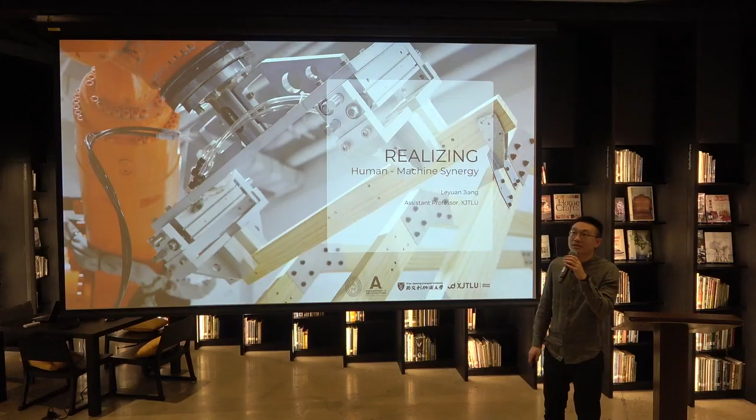Actually, I come from a background of practice. I previously worked in offices like Zaha Hadid Architects and Ole Scheeren offices. And I know that there is a huge gap between practice and research. That's why my research will always focus on how to realize things more efficiently, trying to understand the constraints and the limitations for the construction and how to enable the design. And at the same time, the design should consider the fabrication-aware design methodology inside these working processes.

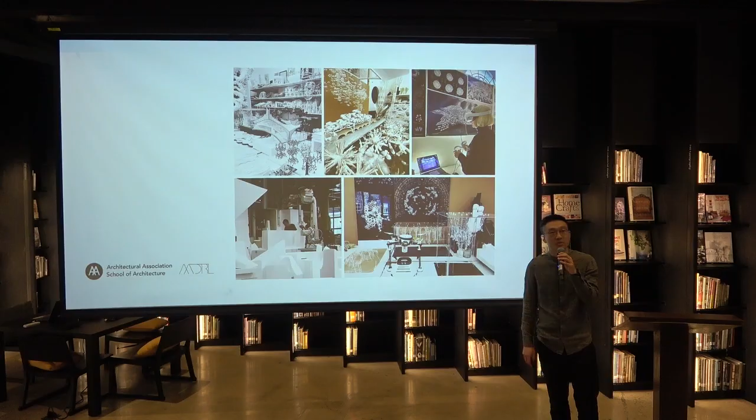Before I jump into the works we have done, I can give you a brief introduction about my history. I got this interest in materialization starting from the Architectural Association School of Architecture, and particularly the Design Research Lab. This lab is quite different from traditional architecture education. It actually prioritizes thinking about what is future architecture. How does architecture respond to the coexistence of users and other creatures, and also the building itself?

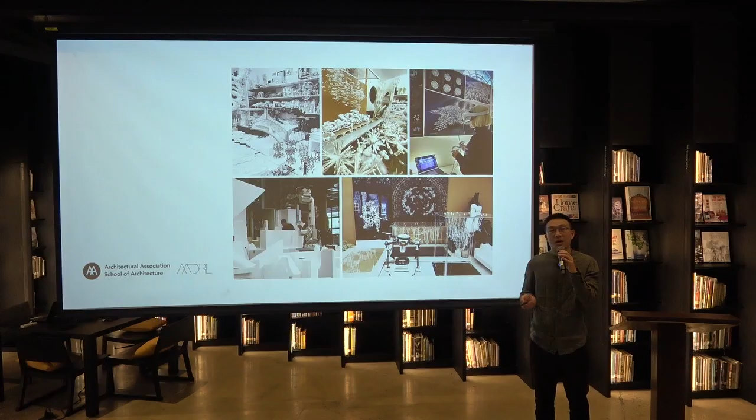And with these things in mind, the question I was particularly interested in is how to realize these designs, right? And then it becomes a problem about how to materialize things. And this is what I did in my group. We were looking at how these new things and new ideas can be realized with materials research and connection research. Further on, I worked in an office and tried to extend this knowledge to materialize in more architectural materials like concrete, timber, even steel. But most of them are in small scale.

And small scale is relative, because some of them are already like 3 stories high, 10 meters high. For example, this one is a sculpture made with stainless steel. It's around 8 meters tall. But the argument we are having in this project is once we start to manipulate these different types of material and topology, if we can extend these things into architectural scale and further free up the hand of designers, then you can actually design and realize complex things that you never thought about before.

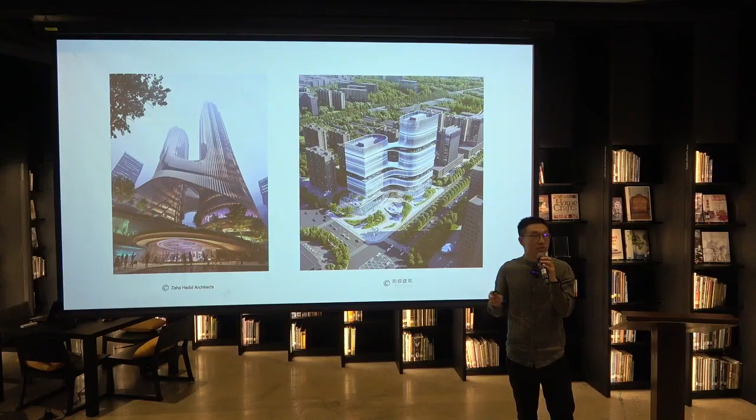And I also worked in more practical projects, and the focus in these projects becomes understanding the constraints in the real architectural industry. The first one is a twin tower, and the second one is 100 meters tall. With this, we always keep in mind that architecture is not just a box. We have to take inspirations and references from nature, try to get this smartness into the architectural design, and then try to find a way to realize this with the digital tools and also the manufacturing tools available.

Similarly, in the urban planning projects, the natural thing is again shown very obviously in these projects. The language is consistent, so you will see the relationship between the individual and the whole. They speak the same language and then form a very strong concept in a way.

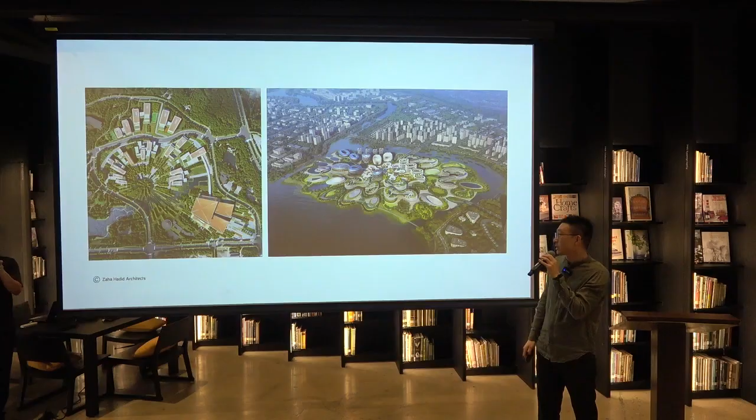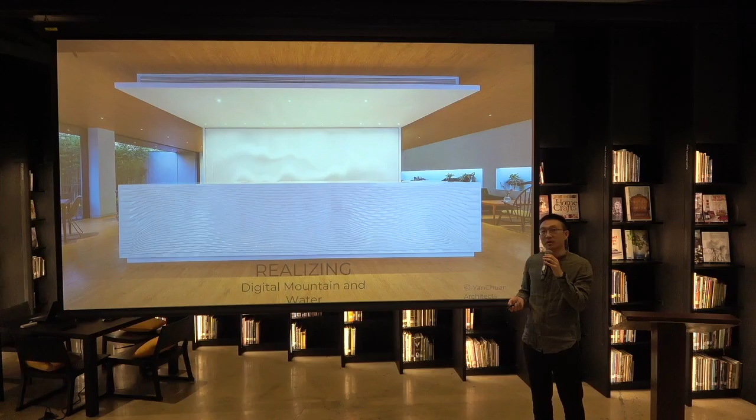But the thought behind this is not just printing something randomly. We are actually considering what is behind the design. At that time, I think one term called parametricism was very popular. Patrick Schumacher, the director of Zaha Hadid Architects now, and also the founding member of the AADRL, in his philosophy said the architecture should be malleable.

By saying malleable, I think anyone who knows parametric design or generative design knows this, right? You have some inputs and then your building or your massing, all the design outcome can somehow relate to the inputs. And with this in mind, we were thinking, what is actually different? If this is applied to all architecture, does it mean the building in Bangkok will be the same as the building in China or in Europe?

So we started to think, what is actually different? The difference is actually the designer. So we started to think how we can emphasize this design thinking in our design processes. This project was about tea house interior design. My friend designed the whole interior space, and I was in charge of this. It's a very small part, just a reception desk and a background wall.

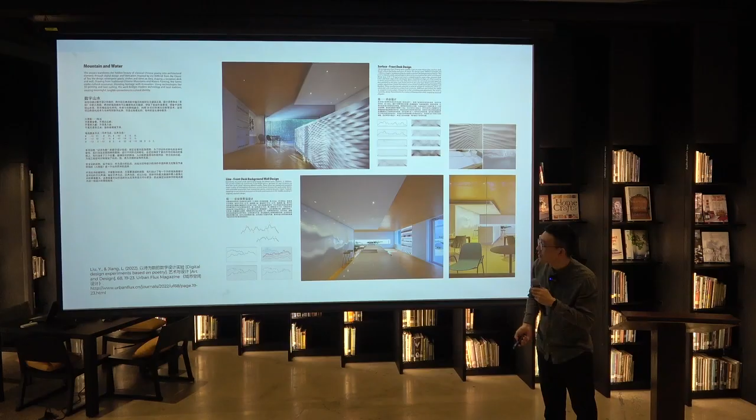And this shows us the power of 3D printing at that time. So we started to think if we can still use this technology to develop more things. This was published in a journal in China in 2022. And this is an extension of that, a project for an exhibition at Xi'an Jiaotong-Liverpool University.

This was a design venue, like an exhibition venue. So a lot of brands and universities, and also there was a booth for the top 100 Thai designers in there. And we joined this venue, and we were given this booth.

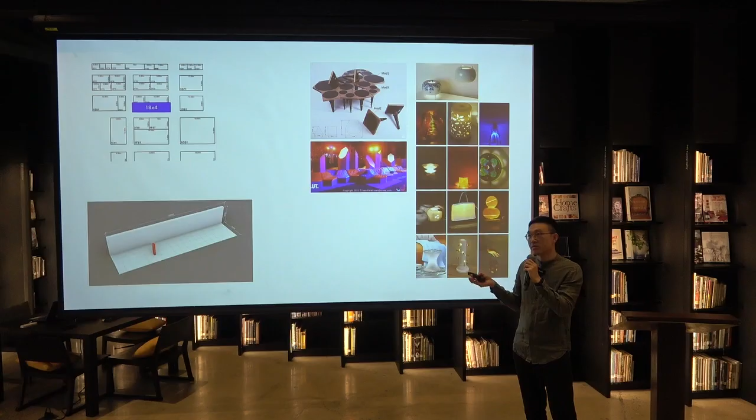It's 18 by 4, and the depth is not so big, but we don't want to show everything just lying there without any interaction. We want people to move in and actually experience spaces. Also another important thing, we have to show some exhibits from our colleagues. Right? It's not just about the booth itself.

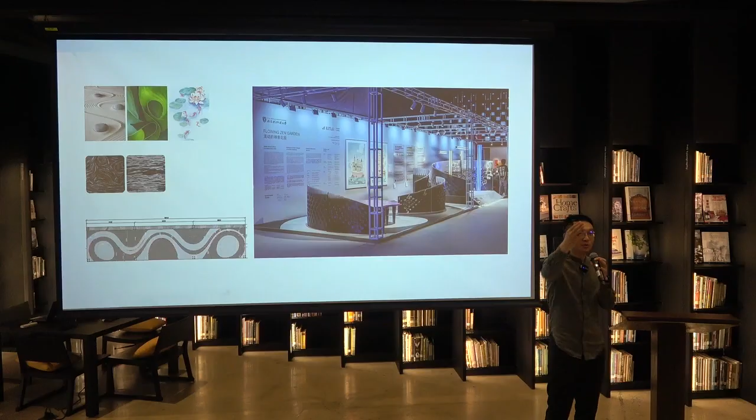Because we are located in Suzhou, if any of you know the traditional Chinese garden, this sense of feeling is very strong, that you are always walking inside like a puzzle. You don't know exactly how to go to the other side if you see that. We're obsessed with this kind of feeling, so we want to create a similar feeling.

And then we started to look at what is actually associated with the traditional Chinese garden. We took inspiration also from nature, like the stone and the water, and also plants, and how the fish interact with the lotus leaves. And then the idea came to us. We want to also express the sense of field. So any object has this power field.

So you have a relationship and also a reaction between two pieces. Or for example, two of us, if you are close to me, the feeling becomes very different than when you are far away from me. So we started to create a kind of magnetic field feeling, and we use a consistent language to design the ground, and also these screens, panels, and the back wall there to define the space and guide the circulation.

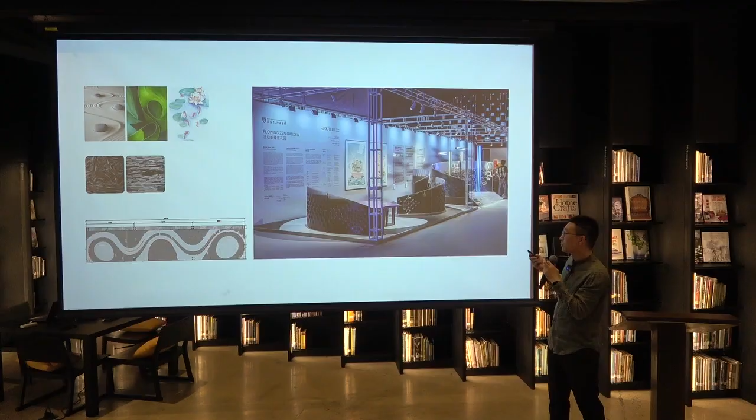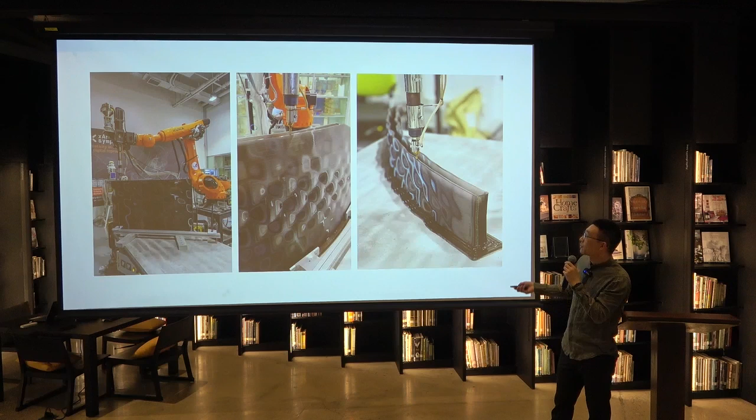We also extend this feeling from the ground, from the overall design, to these screens. You can see here these ripple effects actually create a very vivid feeling about the space. When you walk inside, it's very experiential. So how to create this? We use robotic 3D printing in our lab, and it involved a lot of technical tests, like material, heating, temperature, printing speed, mixture speed, and we also did material color changing. So this is the final effect we achieved.

A couple of sections about the booth and the reflection we want to create. Because actually it's not a static thing. When you move inside the booth, because of different lighting effects or reflection, you can see the moving pattern of these screens. And it's very nice that all the visitors, when they came, didn't even look at the title, Flowing Zen Garden. They immediately told us, wow, this looks like a Zen garden.

So this is a very successful project for us. We got the IDEA Design Award, and the award ceremony will be here this weekend. We also got the European Product Design Award for this project.

Okay, after that, this is a very small research project I did with some of our undergraduate students. Before that, I came from a firm mostly doing very commercial things, right? And I found it very difficult to really achieve high quality smoothness in the construction of the facade cladding, even though you're paying a lot of money. They look nice, but in the end, most people don't know how they were produced.

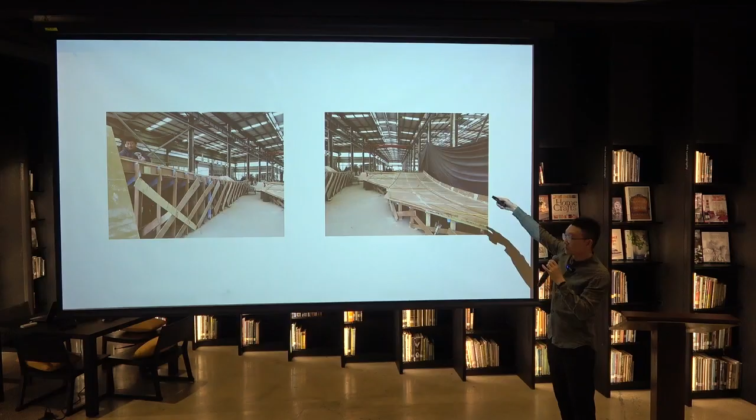So in this project, I took some of my students to the factory to understand how these things are produced. They were making this mold for the concrete. The glass fiber reinforced concrete panels are sprayed onto this formwork and shaped, and then they demold and polish the outside. This process is very time-consuming, creates a lot of material waste, and it's not sustainable because all this formwork can only be used once.

Even though they can be used repetitively, the wooden formwork can only be used twice. So this is a huge waste for this production. And for some very highly repetitive projects, they will use the silicone mold. In order to make the silicone mold, you have to make the GRP mold first, then cast the silicone, then use the silicone. And the silicone mold can only be used 10 times. So in this industry, the waste is huge, and it requires a lot of labor.

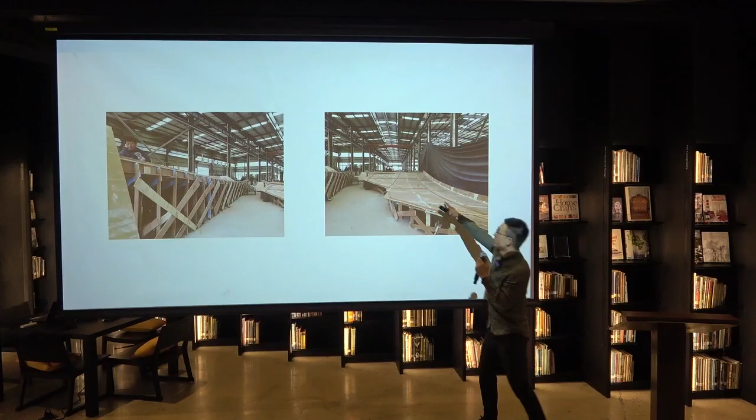Inside this factory, I talked to their boss, the owner, and they're saying the only digital part they're using is just to CNC these pieces you see. That's it. All the other things are manually done. So it brings another problem, which is the precision, right? How can you make sure it's precise if you have huge requirements for the smoothness?

And then we started to think if we can use some digital technology to enhance at least the efficiency, if not the precision. The precision can also be reached only if the designers know how to fabricate it, and then design tailored for this technique of fabrication. Right? In this case, we're using a hot wire that cuts through the foam and creates this pattern, and then you can cast the concrete inside.

After this, we did a test. We cast the concrete inside, and then we did a 3D scan and tried to compare it to the original geometry. The deviation is very acceptable in this mechanism. We didn't go deeper into this research because we talked to these glass reinforced concrete companies, and they are not sure if they want to continue developing it. We're using this as a proof of concept and asking them if they want to collaborate with us. And this is a short video to show you what we did for this project.

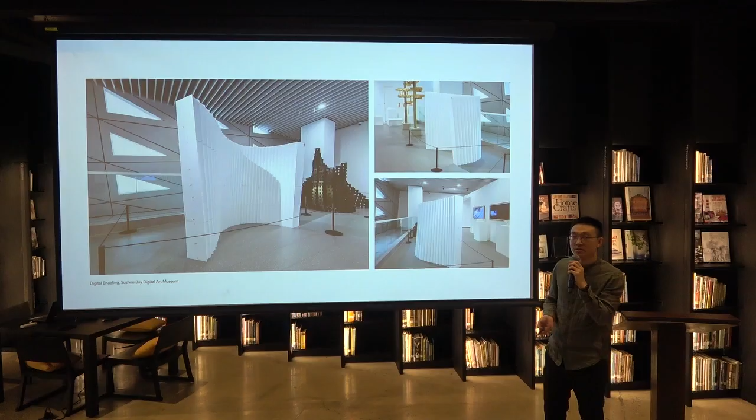And then we also extended this wire cutting technique to more artistic pieces. This was exhibited in an exhibition in Suzhou. This building was designed by Pritzker Prize winner Christian de Portzamparc. So it's also a very good opportunity for us to showcase. This is inside the exhibition called Digital Enabling. It's all about digital design, digital fabrication and digital experiences. And this project was also an extension from that.

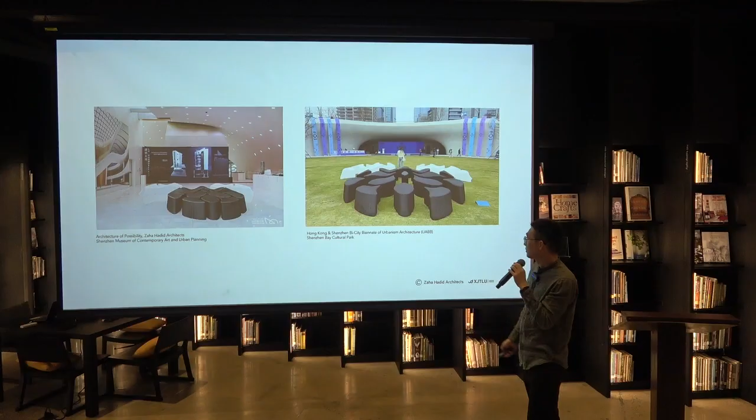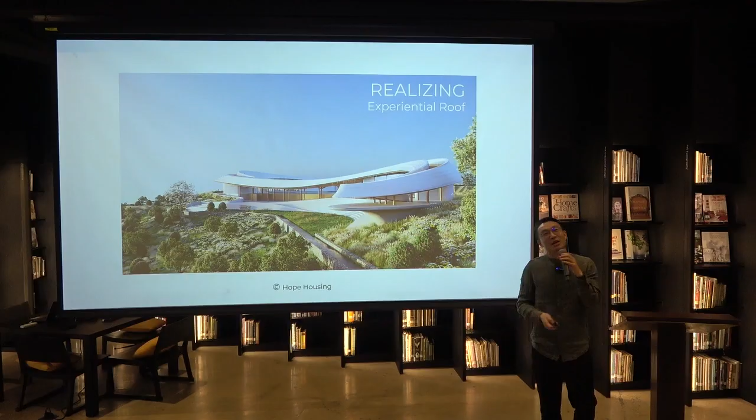After that, we were thinking, okay, you have all these constraints. What if I don't want to consider the constraints? I don't want to do rationalization, maybe I don't want to compromise the design. I just want to keep exactly the same design. What to do? Then we moved from either casting or spray concrete to directly 3D printing. So this was the roof. This white thing you see, like the ribbon, is all 3D printed.

So with that, similarly, it's not so easy, right? It seems like you have all the freedom because it's 3D printing, but you have to consider the constraints for 3D printing. The constraints will be, firstly, the size of your machine, right? For us, we're using a robot, so the size cannot be too big, or it cannot be too small. So you have to consider the constraint for this.

And then the constraint for the material itself, because the concrete is still liquid, more liquid than stone, right? So you have to consider while printing, if it's too slow, then the adhesion between layers will not be so good. If it's too fast, then the initial strength is not gained yet, so the deformation will be very big.

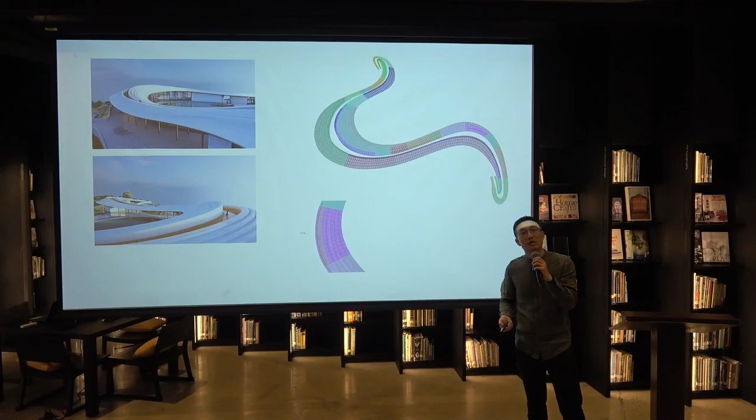And if the pace is too high, then the deformation for the setting will be too big. All these constraints need very rigorous research on this part, how to print just one piece perfectly.

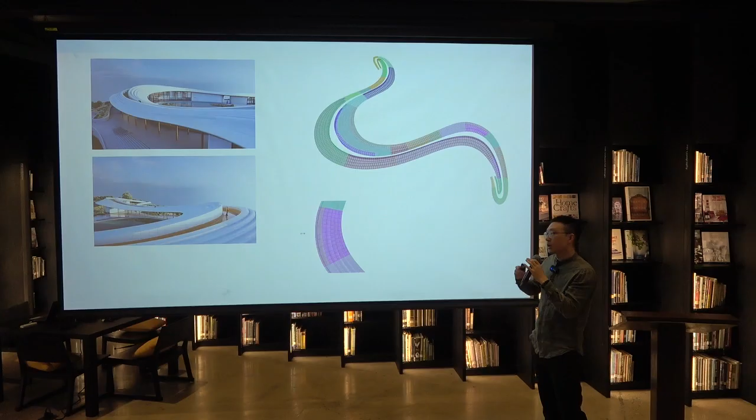So we started with panelizing the whole ribbon, and then we defined the parts like systems. We call it facade systems, right? Divided them into parts of the system, and then we have to actually consider also the efficiency for the printing. For example, in this part, we cannot always keep this continuous, because if we cut here, then this piece will have 1 or 2 more pieces, which means you will spend at least 4 to 5 hours more just for that.

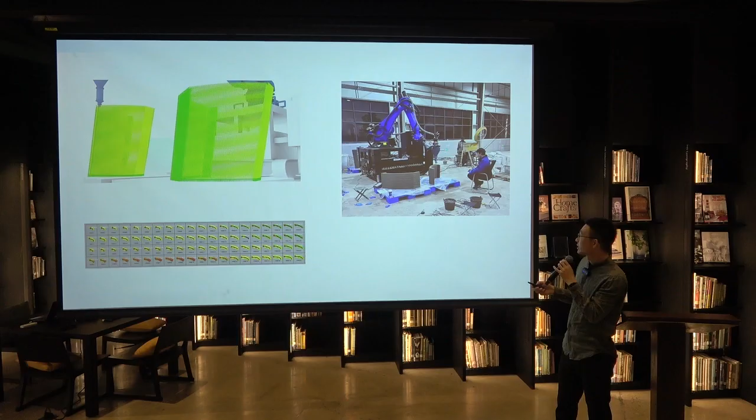And then we have to do printability test inside the digital platform to do the simulation. And then we have to analyze all the pieces inside this. This is just one part of that. And then after it's proven inside the digital environment, we have to do a mock-up test to see if this is really standing up. If not, we have to revise back to the digital platform and do it again. So this is a recursive, iterative process. And this is how we did the printing.

Actually, inside we have the rebars, even though it's not so functional, but it can still provide some of the tension for the concrete, which is the weakness of concrete itself. If you see this pointing out thing here, we embedded this connection for the assembly. I didn't talk about the details of tectonics. We spent a lot of time also figuring out how these things can be connected and assembled on the facade, on the roof also. This is the final.

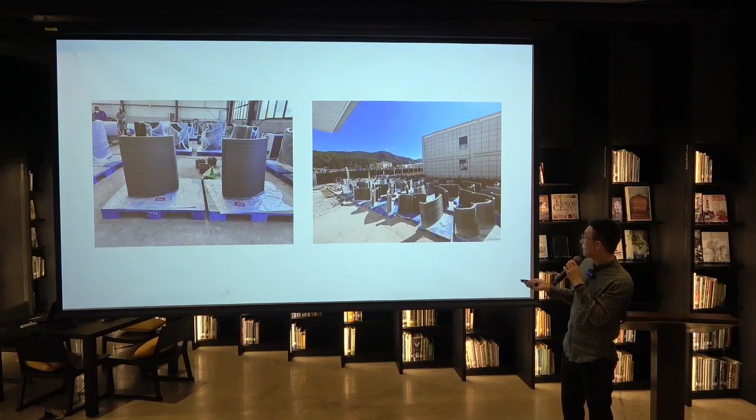So the plastic sheets are curing the concrete here. This is the progress of the building. Now it's finished. The main part is finished. Now it's time to install the panels.

And also in collaboration with the same company, we did a 3D printed bridge. It's a very simple form. The challenge for this bridge is actually the turning angle printing. So it's not always slicing horizontally. We have to print with gradually changing degrees.

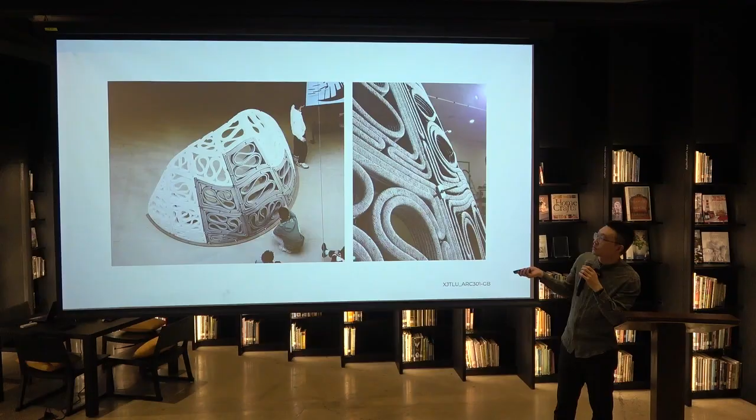We did not stop just in practice. We also bring these things into teaching. This was done inside our school, and the students learned all these techniques about how to develop the geometry first, how to develop the printing toolpath, then how to produce the piece, how to cure the material, and at the end how to install them.

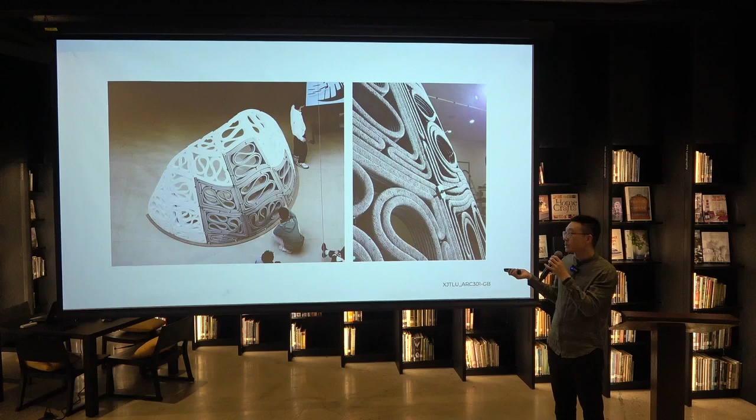So after the whole process, they've learned they can actually do something else even if it's not about concrete. The workflow will be quite similar. The thinking method will also be similar.

The following two projects will be the international workshops we did in our university. This is the first one. It's called Steel Fusion. It was done in 2024. We had a team of tutors from SciArc at that time, and also AA and Bartlett, and me and another colleague from our university.

We had Igor Pantic from Studio Igor Pantic and UCL come for the crit and also a guest lecture, and we had Matthew Tam from Karamba 3D and B plus G engineering company to give us guest lectures and also some instruction. We had about 20 students from different universities from Europe, Hong Kong, US.

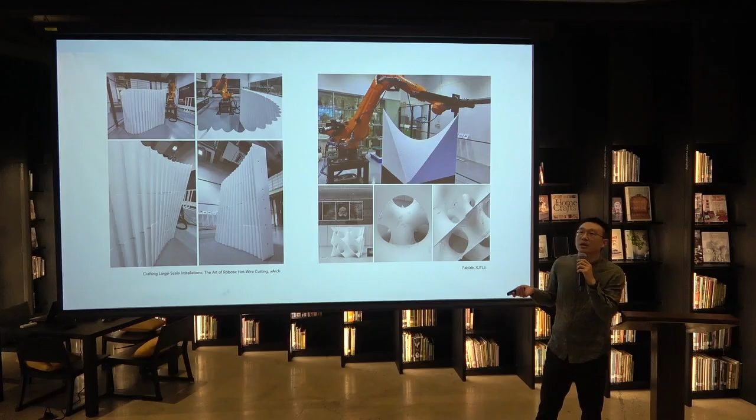This workshop was based on the previous research I've done on digital fabrication and augmented fabrication. So we extended this workshop by understanding the material behavior and the constraints of these techniques in construction, and also built on previously done projects. So in this project, we started from the design to the development and then to the construction. In this process, we always kept in mind that we have to do fabrication-aware design. In that case, you can have the best outcome of the design.

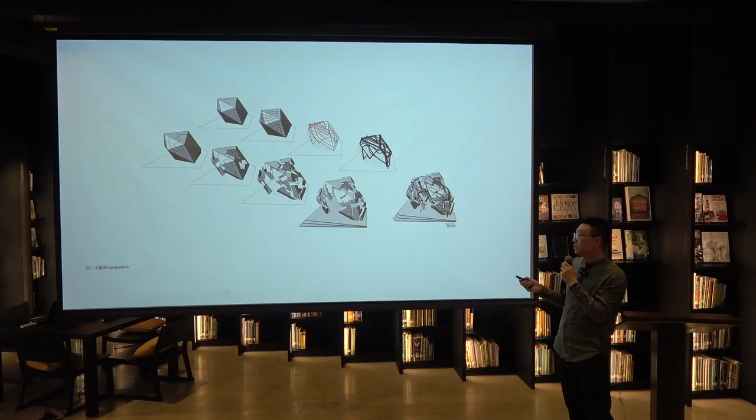So the pavilion design initially is a very simple shape, and then we generated the paths like this for the structure and the panels for the decorative parts. So this will be the final outcome, and we used AI to visualize or to give iterations of design options for our reference, and we also used this to communicate, because this is the space inside the Suzhou Museum designed by GMP, and this is a high-level museum in China.

We had to communicate with them a very long time before the design was even finished, to get the support for us to exhibit there. And at the end, we didn't get it. We got this space. I showed you before, this is also inside the building designed by Christian de Portzamparc.

And this pavilion was divided into 3 parts mainly. The first part is the outer part: the foam cladding, and the structure. The structure consists of the main structure and the substructure, and the base is the wooden part. Because this workshop is about digital fabrication, we have to actually generate all the data, all the files to instruct the robots to help us produce things.

And for the cladding, we divide it into 5 parts. We call it 5 chunks, C1, C2 to C5. And all these parts were individually produced by the robots. We don't need to think. We just send the file to the robot, the tool path, basically. The robot generates, and you just put a tag, the label on top of it. And in the construction, you just put them number by number.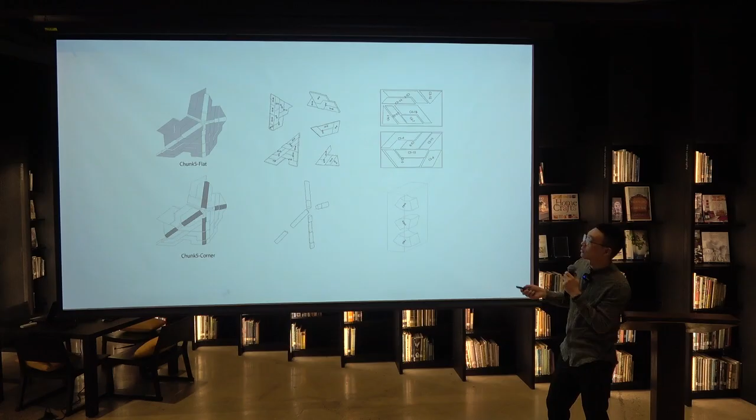Each chunk consists of flat panels and corner panels. And this is how the tool path was planned. For efficiency, we also put a couple of them together inside one foam block. This is how it's cut and labeled.

We also did a painting test. Some paint will damage the foam, some paint will not. Some paint looks nicer, some paint looks bad. So we did tests and then painted. And this is how the structure is composed: the base, the main structure, the secondary structure, and the connector.

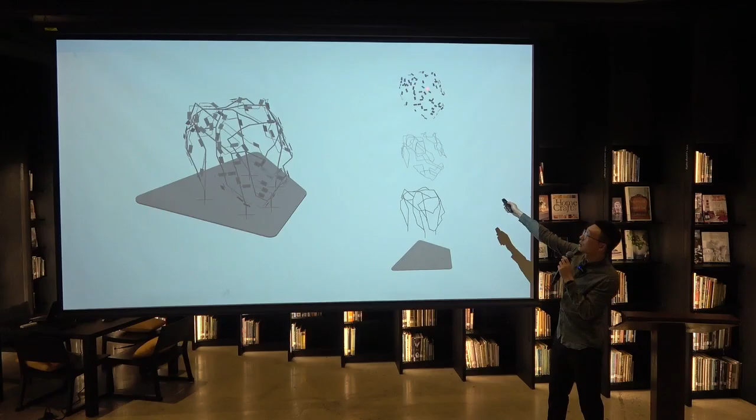The main structure was assisted by augmented reality. You have the vision inside this headset, so you know the degree of the bending. When you bend to the desired degree, then you can stop. And with the system, you can bend all the pieces and connect them together.

And the secondary structure, the substructure, is also bent with rebar. You can see here they are wearing the headsets and connecting them. And the connecting piece is also assisted with this augmented fabrication. The base was CNC milled.

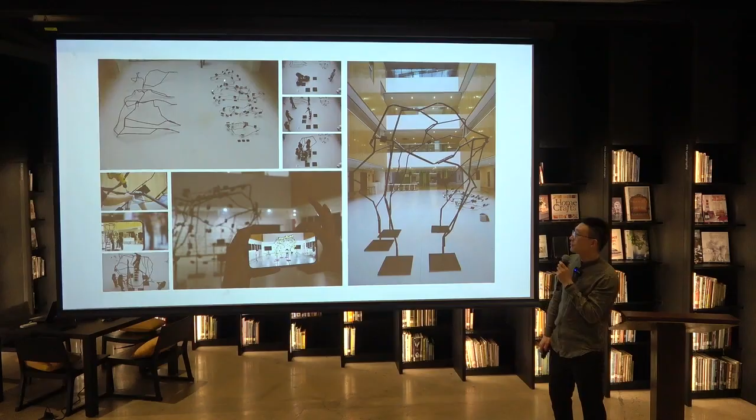And here is the assembly. You can see all the pieces were laid down on the ground. It's a huge work, and this workshop is only 9 days. The assembly at the end took 2 days. From the start of the fabrication to the finish of this project only takes 7 days. So I think it's a huge demonstration for digital fabrication and AR-assisted fabrication. At the end, it's built, and I can show you a short video about this workshop.

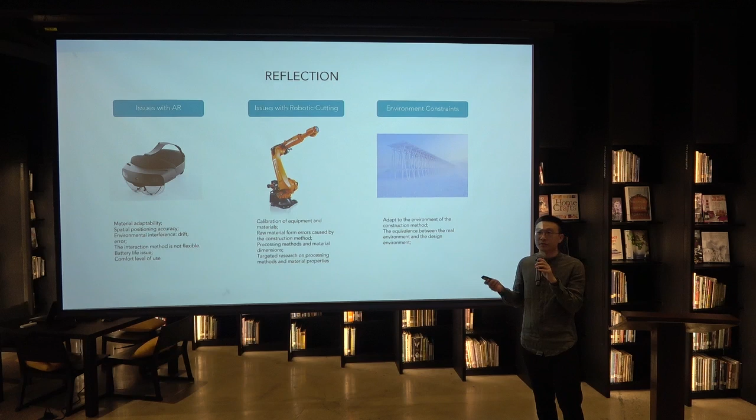This project was a great success for us, but we still think it's not enough, because we found some very challenging parts. One is the precision, because we relied pretty much on giving the precision control to the AR. And on the other hand, the property of this material is elastic, and you cannot really control the bouncing effects of this material.

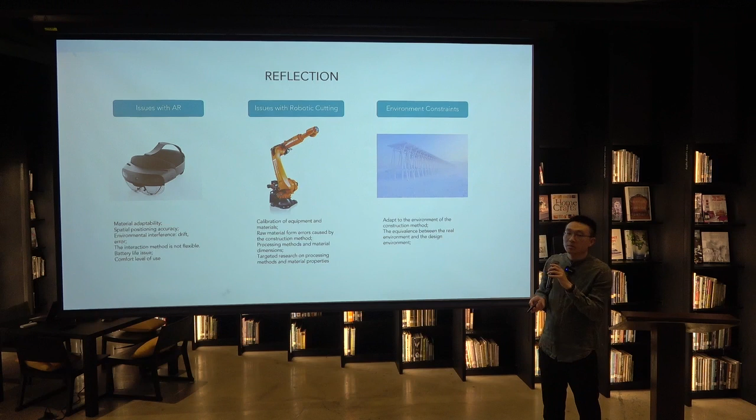Because we were facing another huge exhibition, after this we did another one. These issues are well known. I think this was published everywhere, and I don't think this can be solved in a very short time. It's not inside our scope. So we didn't pay too much attention to it, but we were thinking how we can use design to avoid these problems.

And so we did the second version. Compared to the first one, we developed everything, basically: the cutting angle, the workflow of the cutting, how you can custom make a tool for the cutting. And we found a contractor to help us realize this. We simplified the inner side of this pavilion. You can see all these things are clearly labeled, and also the sequence of how they can be joined together.

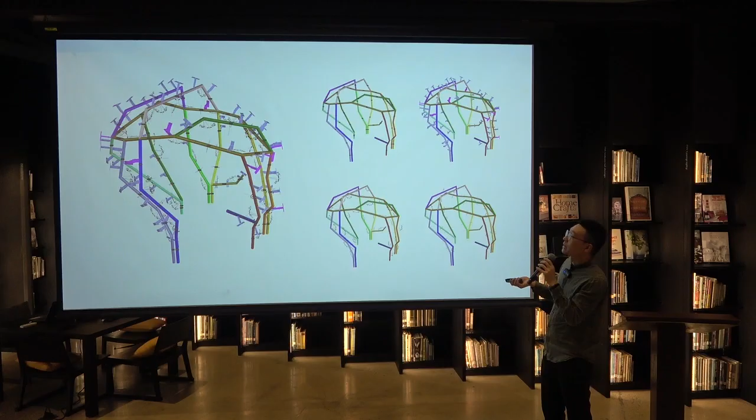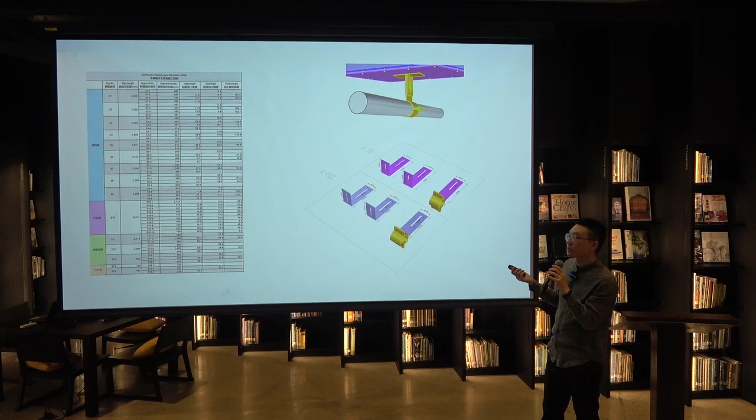And we even designed the connection method. We involved the facade engineer to help us. All these things were generated in the table and sent to the contractor. We also made some of the pieces modular, so they can produce more efficiently and don't need to consider the labeling issue. We involved the structural engineer to help us rationalize the structure, and then we reiterated the design.

So this is what we did for the second version. The foam cutting is still the same. We did it in our lab, and these aluminum sheets were generated for the backside, so it's easier to align all the foam onto the panel. The connectors were custom made and all labeled in the connection parts. When they produce the panels, they pre-drill the holes, so you know exactly where it should go. The only flexible part is here.

Flexible part here and here. So we can adjust these two and find the desired shape. So these tubes are all produced with a guideline with the files we generated. This is a test assembly inside the factory.

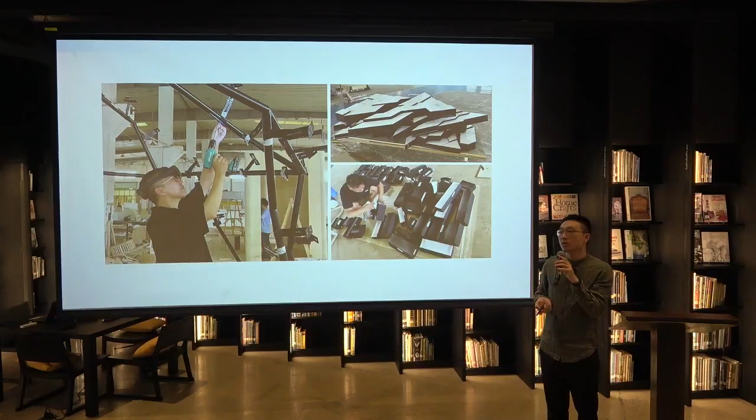And in this process, we altered the use of AR from precision to more of a supervision. So you can see if anything goes wrong, you just know, okay, this piece should go there, and then you just fasten or loosen pieces on the construction part.

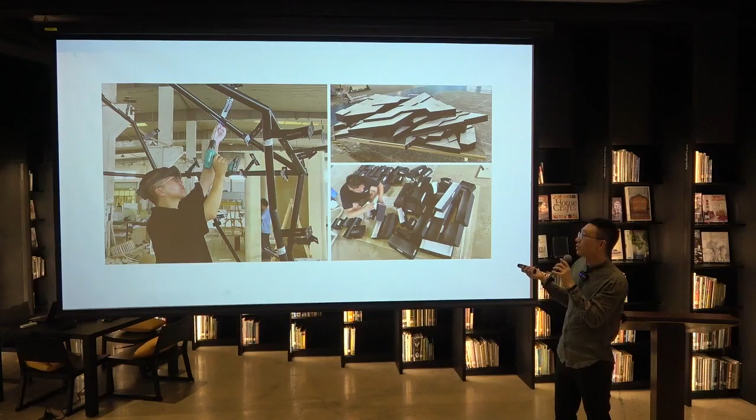And this was exhibited in the World Industrial Design Conference. And also, again, in the Future Labs, at the International Education Exhibition in Shanghai Westbund Art Center, which is a very artsy and popular space in Shanghai. And again, in the Suzhou Bay Digital Art Museum, in the building designed by Christian Kerez.

And these two projects and the workflow were published in two papers. One is CAADRIA 2025 and ICADI 2025. This is a short video about the second version.

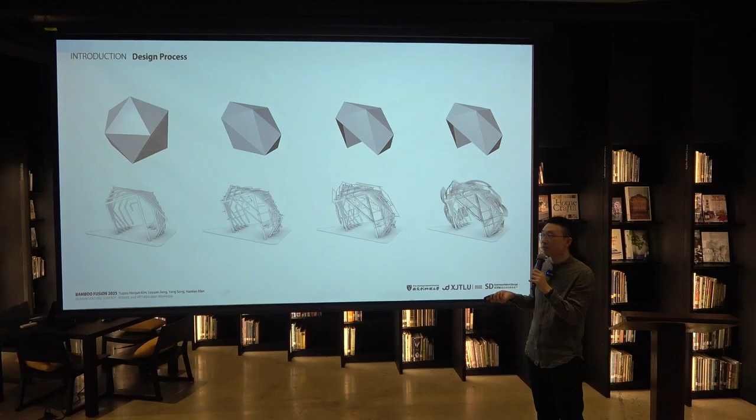And we developed the shape with timber main structure, timber secondary structure, timber frame, and bamboo cladding in this case. We wanted to test if we can use elastic material here, try to understand the behavior, and use digital tools to simulate the behavior. This is the cladding panels. This is how it consists: the base, main structure, secondary structure, the frame for the bamboo, and the bamboo stripes.

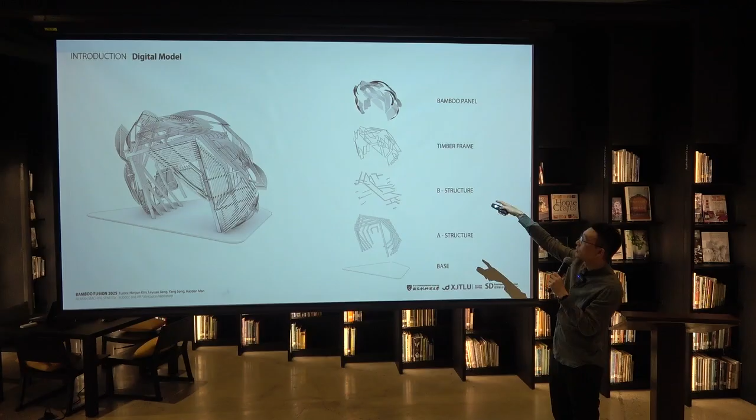Okay, we also divide them. In this case, we divide them into two parts. One is for the structure, one is for the bamboo. There's a lot of elements inside, if you can see here. These were all produced within a week and assembled. This is the structure.

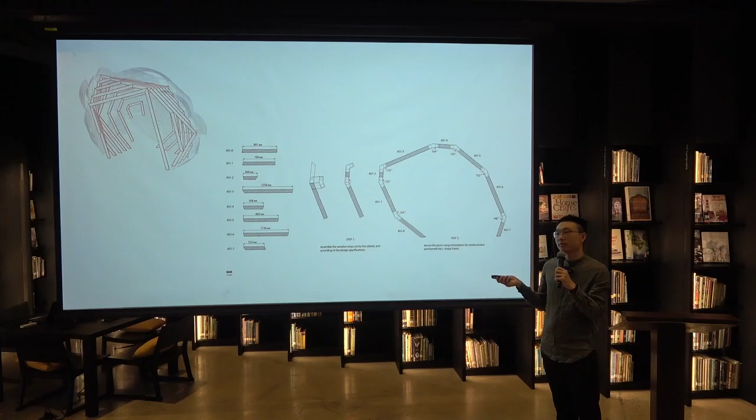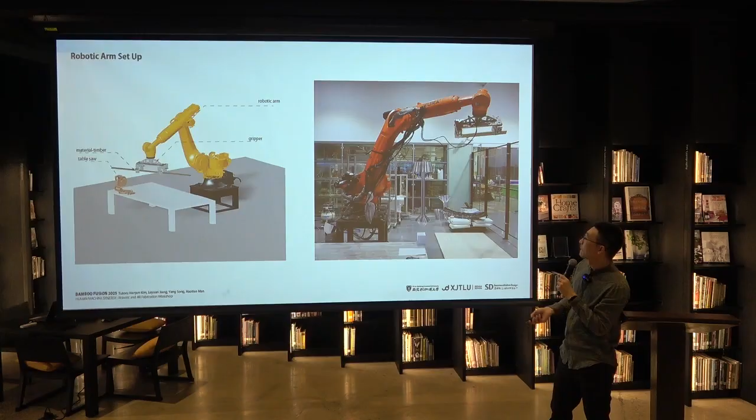Because the timber structure has different angles, and they have to be connected very precisely, in this process we use the robot to help us place the precise angle for the cutting. The robot picks up the timber elements and feeds them to the table saw, and one guy can just cut it. This is the workflow, how it's working: place it and just cut.

Okay, and here we have to be careful about clash detection. So everything needs to be simulated beforehand, before you actually proceed with the cutting.

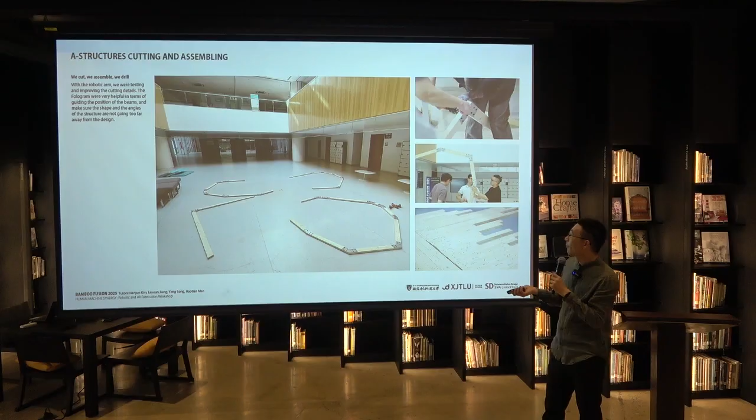Sorry. And after that, we have a laser-cut steel panel here, and we use it as a reference to drill the holes. If possible, we can also embed this in the robotic fabrication path, so we can just change the end effector automatically and drill the holes. This is how they're connected, with bolts and nuts.

The secondary structure is also timber, and we didn't do the same as the first pavilion. In this case, we're trying to utilize as much as possible already-made pieces for the connections, so we don't have to produce them. That way we can also lower the budget and build the pavilion more efficiently. And one big benefit is we can do disassembly and reassembly really quickly for this one.

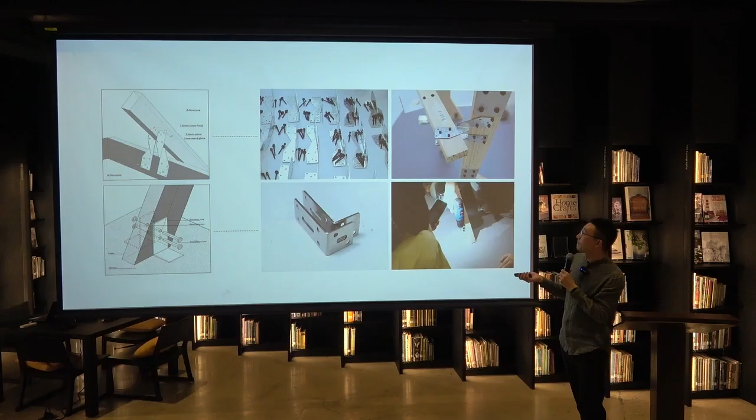And before the assembly, we actually use the robot also to help us detect if the pieces are pre-made precisely and if they can come together very well. If not, we reproduce them. In this process, we use the robot to collaborate with AR vision and also humans to see if everything is aligned perfectly.

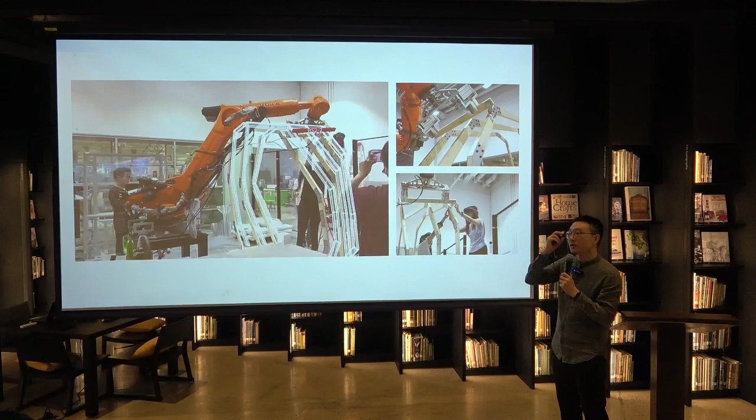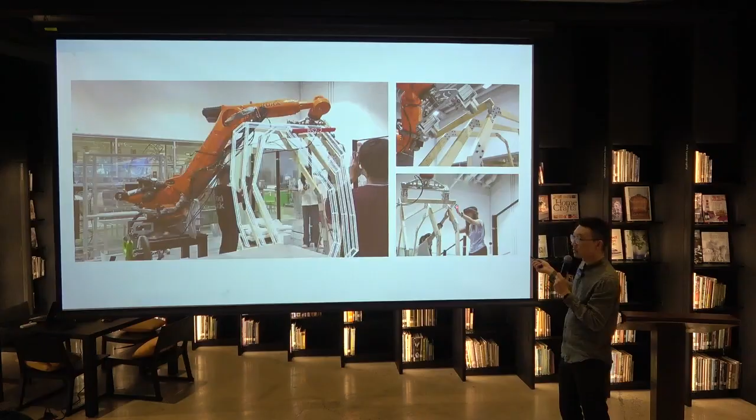This video you see here is from the phone. It's not so accurate. The problem with AR is that the HoloLens, the one the students are wearing on the head, is a lot more precise than an iPad or iPhone. But the problem is it's very expensive. We cannot afford all of them.

And then after checking, it's okay. It can be easily assembled. It's precise. Then we move everything to the site and start the construction on site, piece by piece. Okay, this is everything you can see overlaid on site, and you just place these pieces one by one according to the vision.

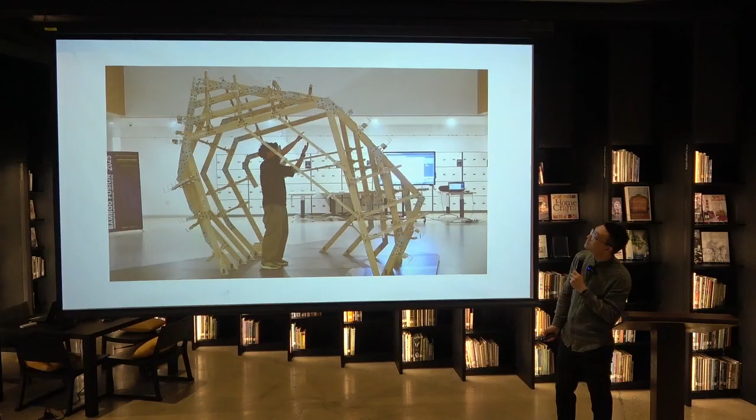And this is the connection for the secondary structure. After the finish of the pavilion, the structure, you can actually use the AR to check if everything is in position or not. If not, you can take measures.

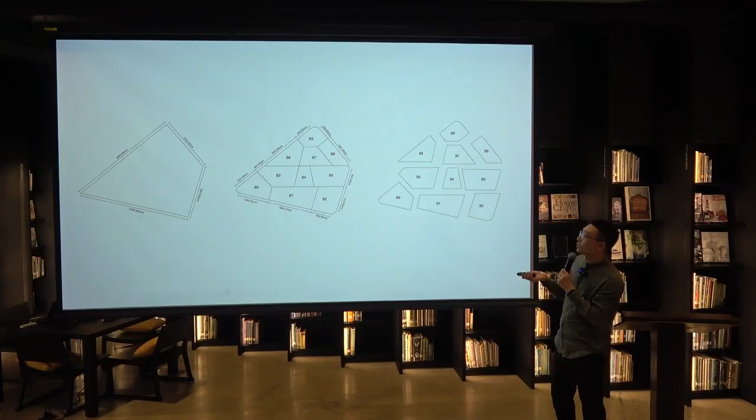The base was also produced with CNC, but here we actually developed the sequence and how they can be used more efficiently and more precisely, and all the holes are also identified and pre-drilled on the wood panel, and then you can just bring them on site and slot them in the sequence, and they will be easily and precisely connected.

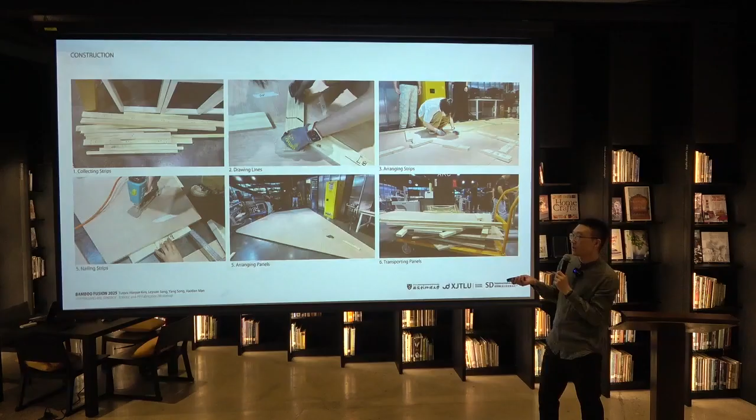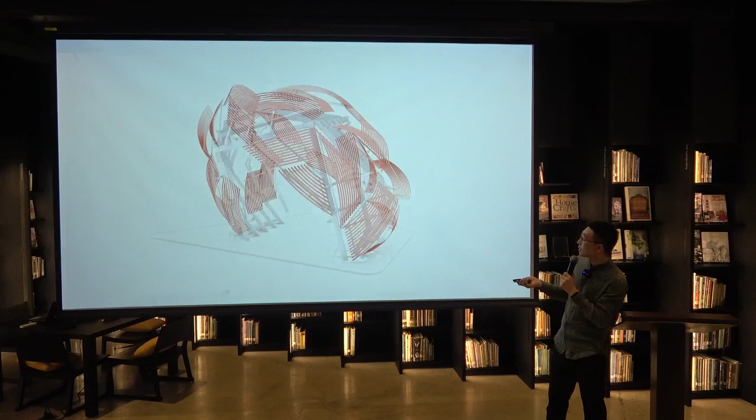Bamboo panels. So in this project, we want to test if we can actually use digital tools to understand the material behavior, and then, in a sense, to control the precise curvature of the material.

It should be a video. It doesn't play. Okay, it doesn't play. It's okay.

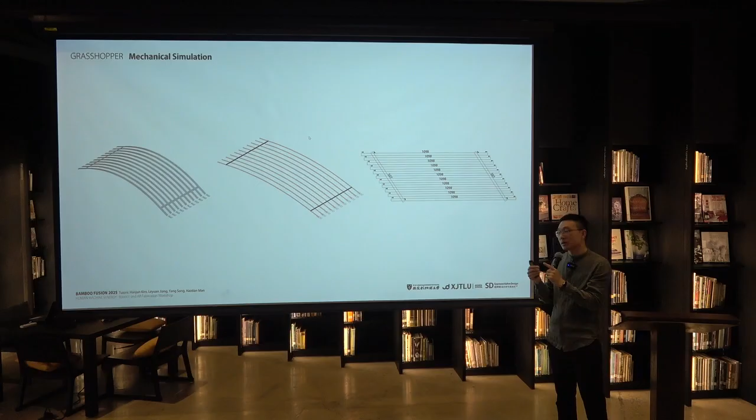So inside Grasshopper, first of all, we get this material, the bamboo stripe, and then we try to push it and find its balance, the strength. It's not too tight, it's not too loose, just okay to keep the shape. And then we try to get this data and translate it into Grasshopper, and then we use this data or the behavior of this material to do the simulation of all the panels.

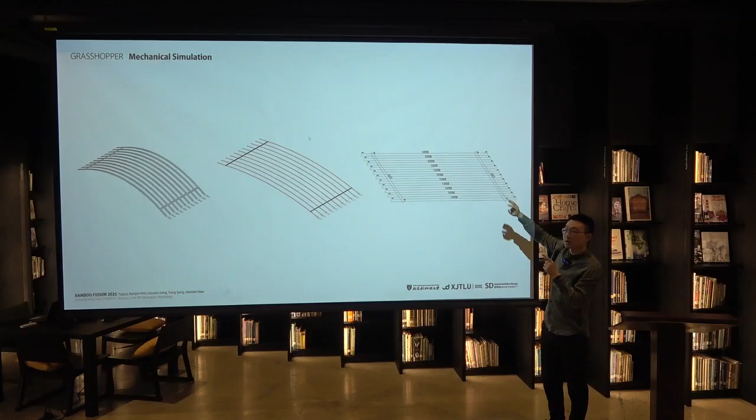Because for this project, the bamboo panels are not rectangular, right? They have an angle, so you cannot really tie it very fastened like this. You have to leave some tolerance so it can rotate. This is a challenge also for this team. And after testing, they finalized a mechanism, and then they applied this mechanism to all the bamboo panels. And they did a test, and it can perfectly align.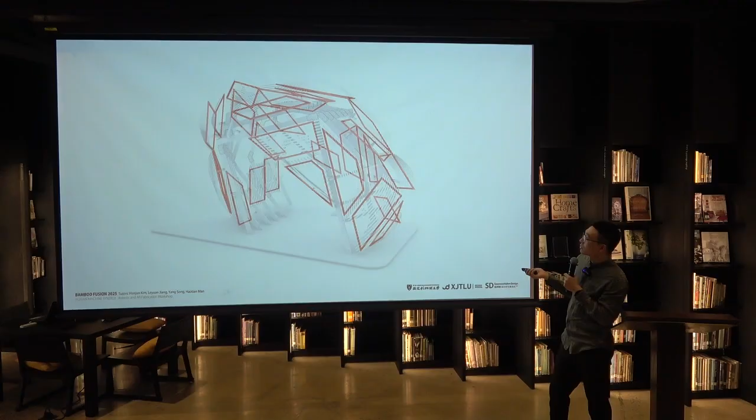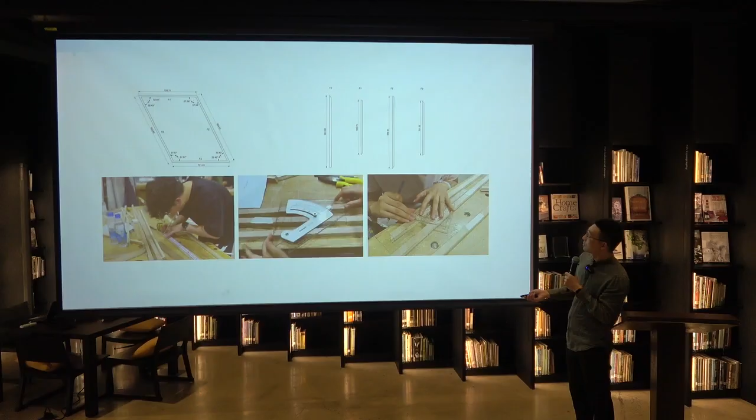So to attach these bamboo stripes, they have to develop the timber frame. And for this timber frame, because they're all different, again, they also produce the sheets, and then they use the sheets one by one on the table. And then they also use AR to guide them how to join them together, with the correct angle and the correct length.

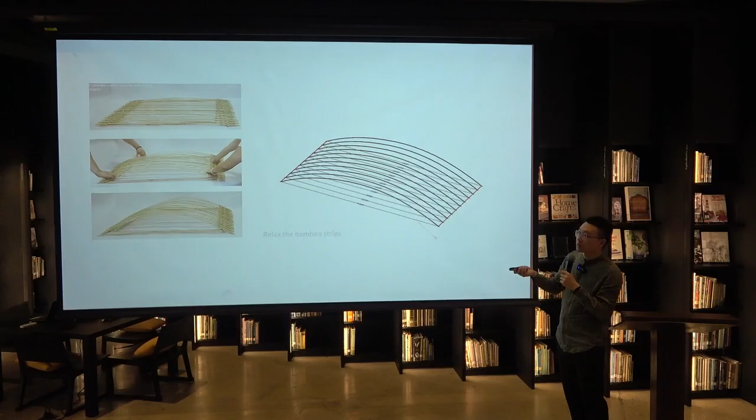Now this is a simulation showing you how this behavior was simulated. And then in real time, these numbers are used to instruct the fabrication of these panels. Once you're tightening up these panels to the frame, it will give you the desired shape. These are all the 27 panels produced for this project.

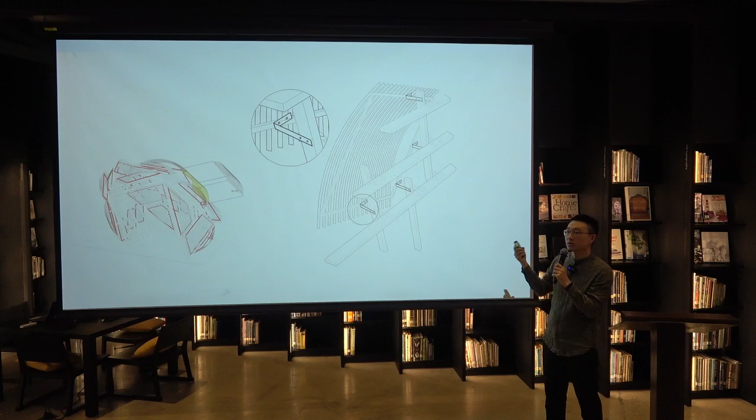And then this connection for the panel frame to the secondary structure uses L brackets, and the location and the touching points are all carefully manipulated in the digital system. So all these things you can see from the AR, and you don't need to drill because the holes are already drilled, so just connect them with nuts and bolts.

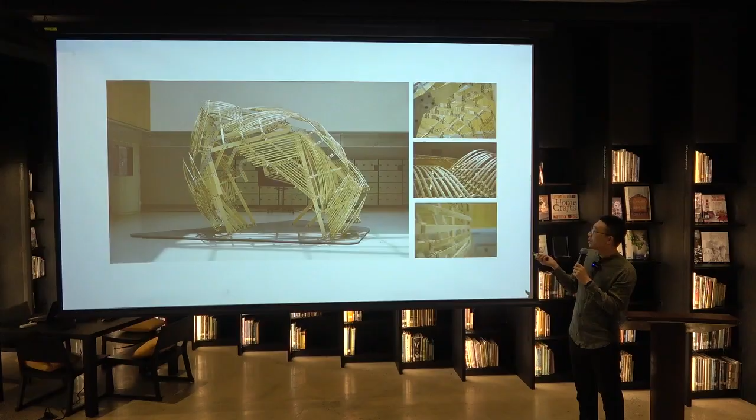Right, this is a comparison between the virtual and the reality. These are the final images, the finish of the workshop, and everybody is so tired after making this project, so they are sleeping everywhere. And at the end, they decided to hit me.

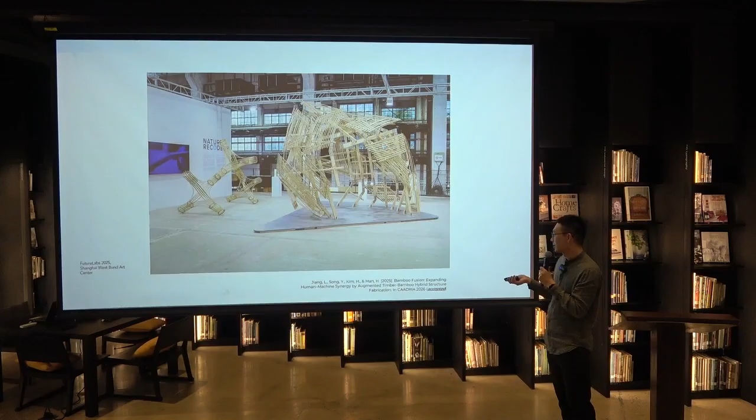And then this project was also exhibited in FutureLab 2025 for the international education sectors in Shanghai. This project was just accepted by CAADRIA in 2026. And this is a video to show you the workshop.

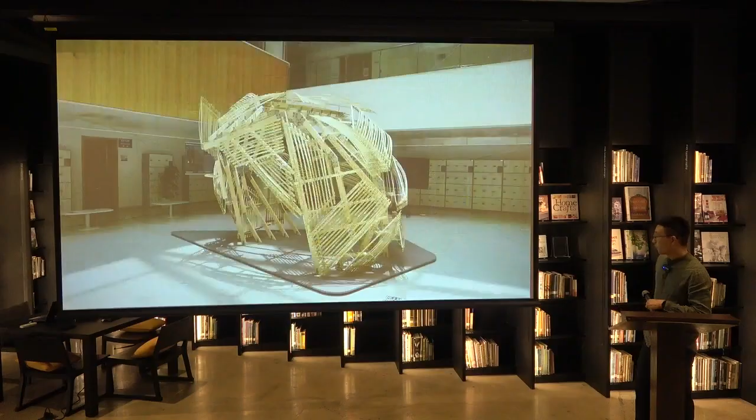Students for the first pavilion came without any experience in digital design or digital fabrication. And the second one is more or less similar. But some of the students from the first workshop came again for the second one, so those students already have some experience, but most of the students don't have any experience.

I think this workflow, from digital design development to digital fabrication and augmented reality assisted fabrication, can have a very bright future to instruct untrained labor to build something very complex. Especially, I think, for architecture it's similar, especially for facade, cladding, installation, etc.